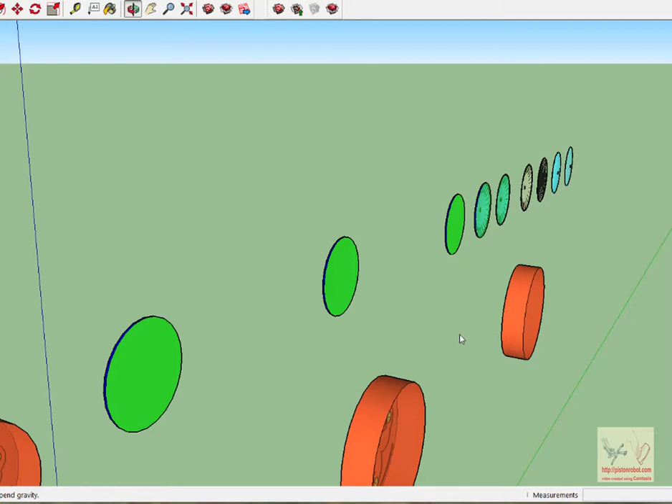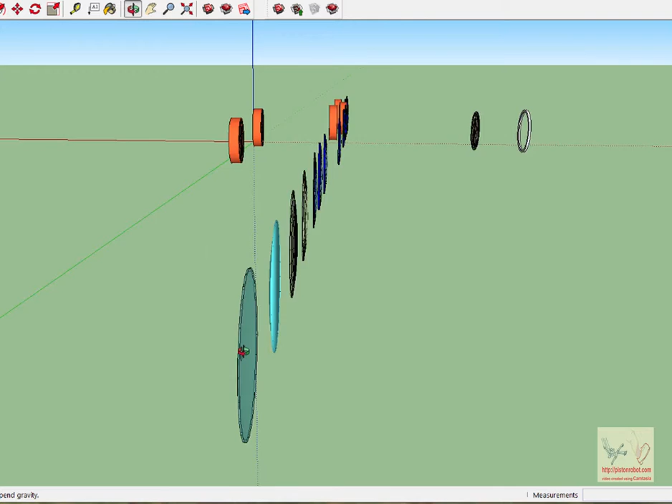Again, we want to reiterate the point that the actual lens in front of the real printing is completely transparent and essentially invisible. But it is not really feasible for us to discuss with you what we're going to be doing with this lens if it's constructed in a manner where you can't see it. So in order for that problem to go away, we've altered the property of the lens so you can see what we're talking about. This is the lens with some blue color added to it and some opacity, so you can see through it and get how it looks.

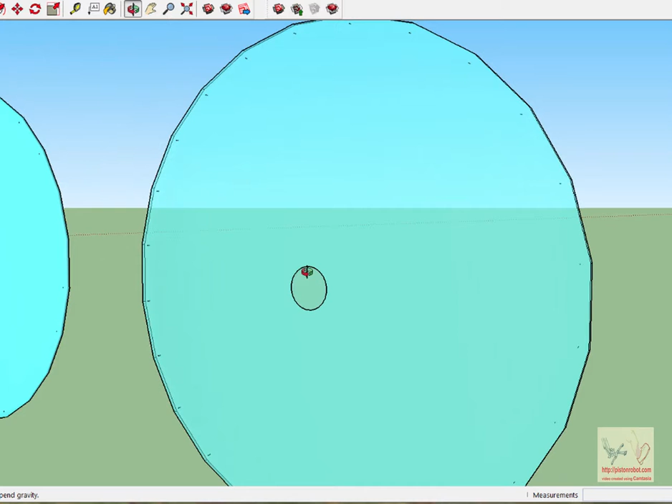You'll notice the way SketchUp draws this, this little circle is a way of telling you where the bulging out portion of the lens is. This is a convex planar lens. One side of the lens pokes out, the other side is completely flat. This side is flat, this side pokes out.

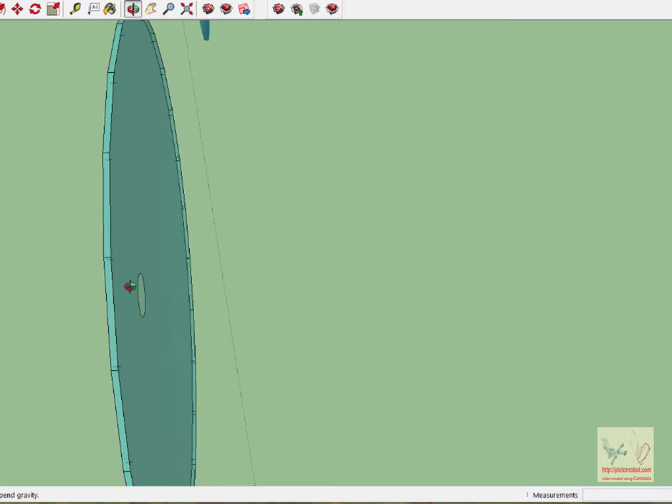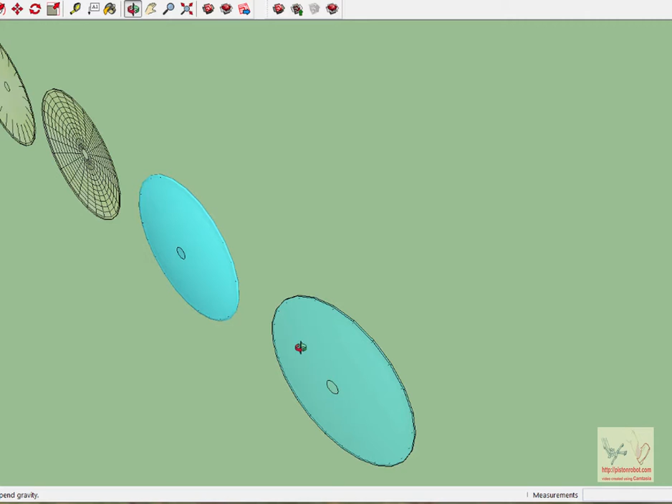This lens, as it is sitting right now, would sit directly onto the printing. But because of the way we want to talk about it, we're going to alter the lens a little bit to continue our discussion. The lines around the lens that are present can be softened by turning on the softening feature of SketchUp. We've also altered the opacity, taking it from something you can see through and converting it into something completely opaque.

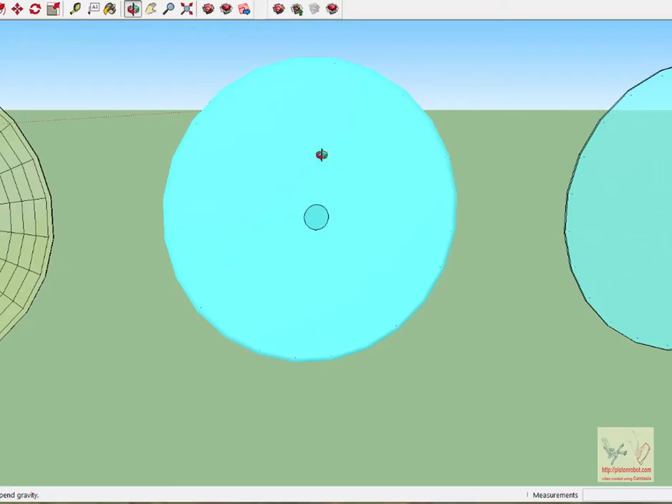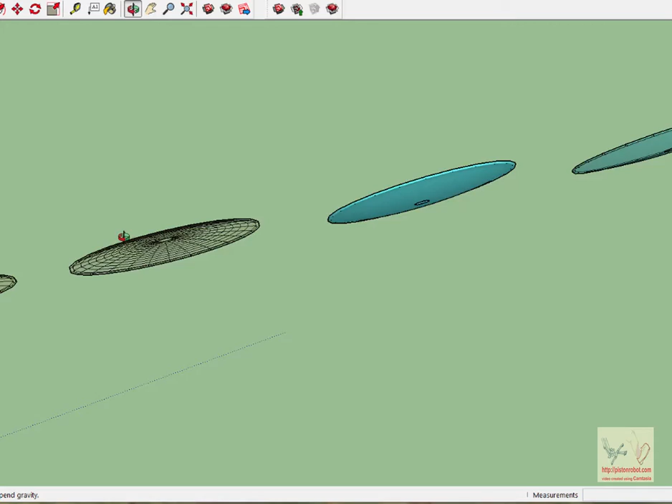The next thing we wanted to do, because of the way this lecture is put together, we need to have the part of the lens that bulges out pointing in the other direction. So all we did was flip the lens. The convex portion used to be on this side, and now the convex portion is on that side. We told SketchUp to change how it portrays the lens, to give it lines so it's easier to keep up with where everything is. And we've re-added some opacity loss so you can see through it.

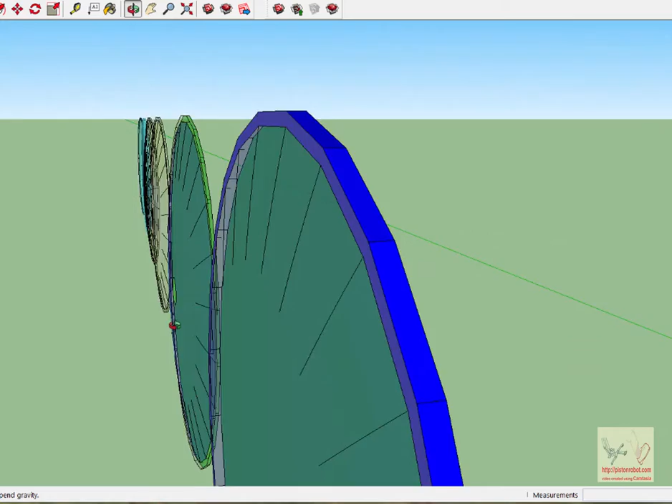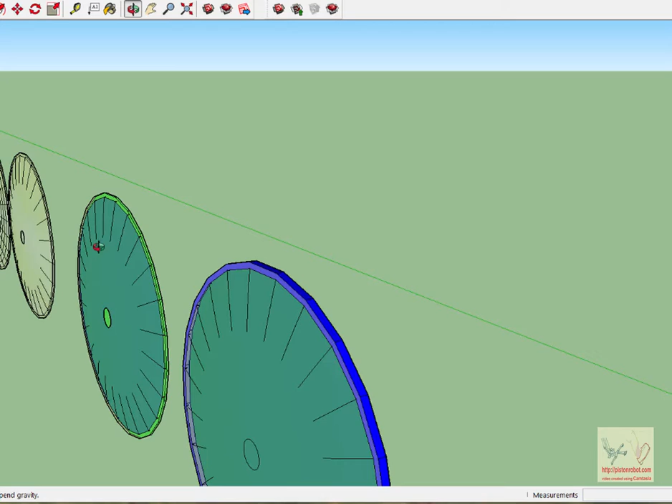We're going to be talking about activities that we do to a particular part of the lens, actually the flat planar side of the lens. So to continue our effort to make this more clear, we're going to alter the colors: we take the periphery of the lens and make it a solid blue color, we take the convex portion that bulges out and make it a blue color that's a little bit transparent, and we go on to look at the back of the lens. To keep the two surfaces separate in your mind, we took the back of the lens and made it completely opaque and another color, green.

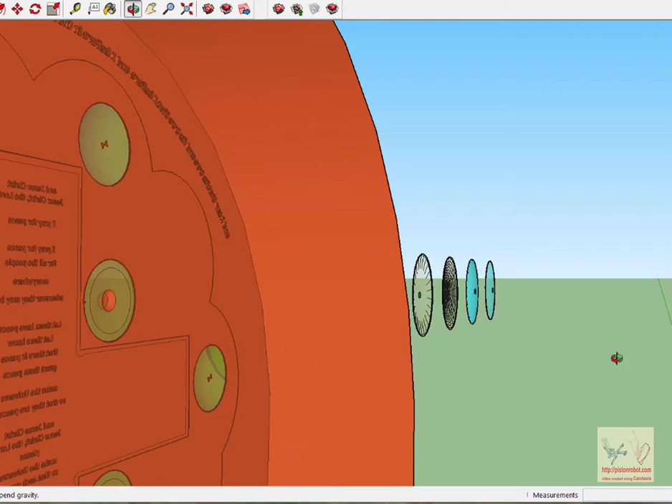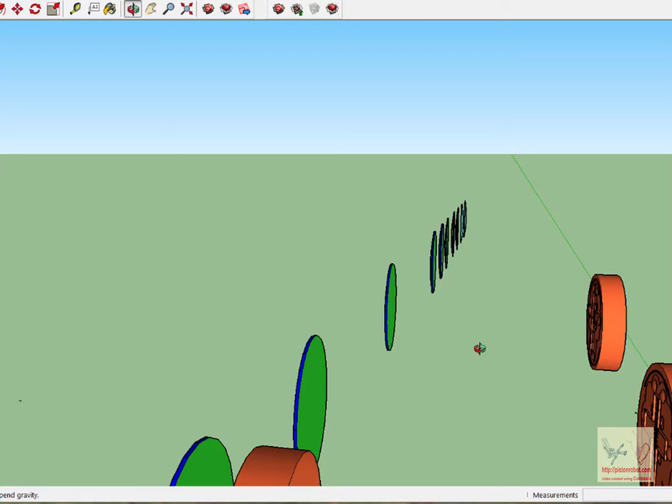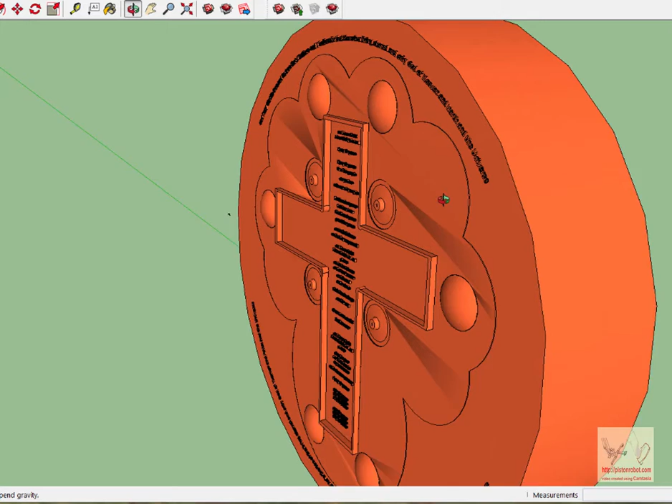Now, the lens itself is going to sit down onto the printing, and the lens has got to have space where the parts of the printing that stick out can stick into the lens. The process we are proposing is to generate depressions in the lens where the letters and various structures of the printing can be. You can see we've drawn in an object here where the various letters of the printing, a small protrusion for the coloring area, and protrusions for the cross and other letters are all present in this structure. We've made this structure this orange-red color because we want it to be completely different from the lens.

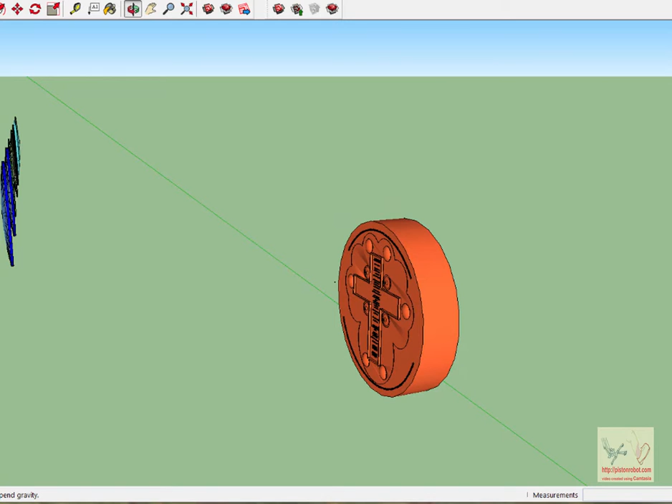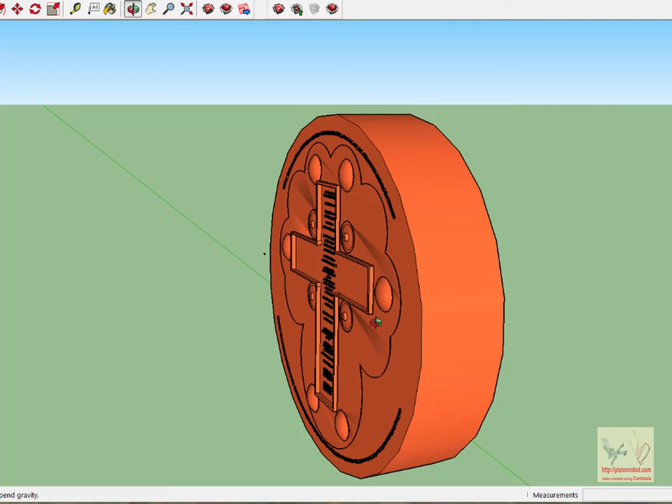This structure is going to be made from boron nitride. Boron nitride is a type of ceramic that has several features that we need. One feature is that boron nitride can be 3D printed. In addition, boron nitride is not affected by the temperatures we need to use. The final feature is that boron nitride does not stick to soft or high temperature or nearly molten ceramics or glasses. It has no affinity for them at all.